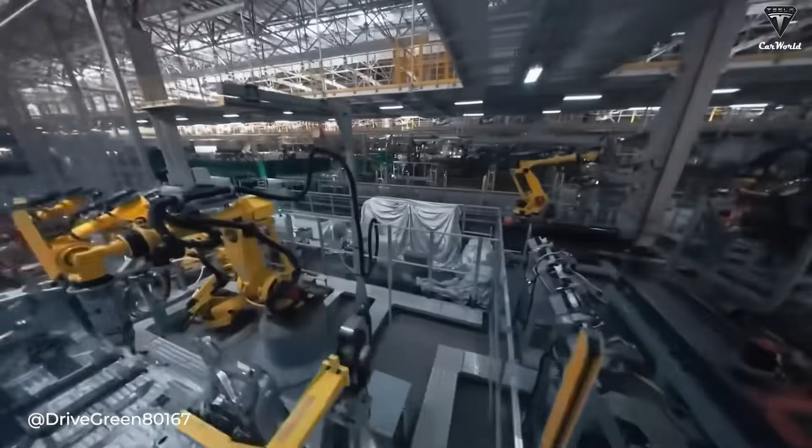One car, every 5 seconds. Not a concept, not a prototype. A fully assembled vehicle, rolling off the line faster than it takes you to read this sentence. For over a century, automakers competed by building better cars. Tesla just changed the game entirely.

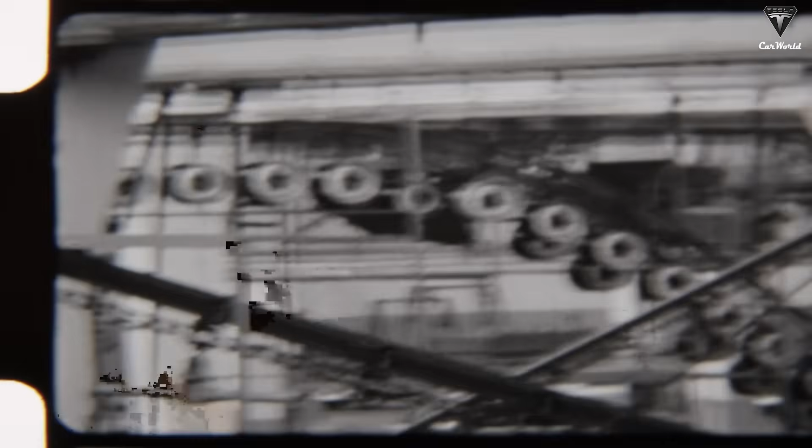While every other manufacturer is focused on the product, Elon Musk is obsessed with something far more powerful: the factory itself. And that single difference may be the reason Tesla's competitors aren't just behind. They may never catch up.

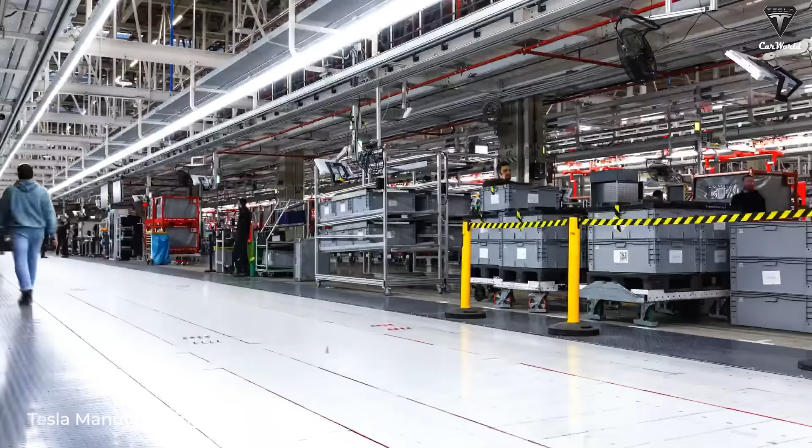For over a century, automakers have competed the same way. You build a faster car, a safer car, a more fuel-efficient car. You improve the product and the market rewards you. That has been the fundamental logic of the entire automotive industry since Henry Ford rolled the first Model T off an assembly line in 1908.

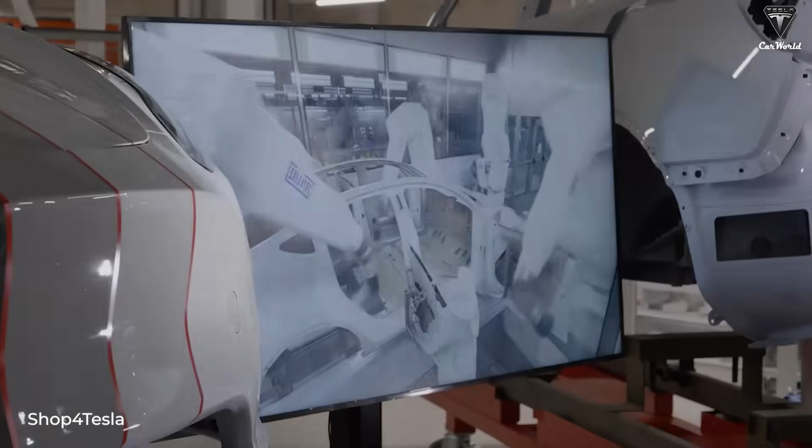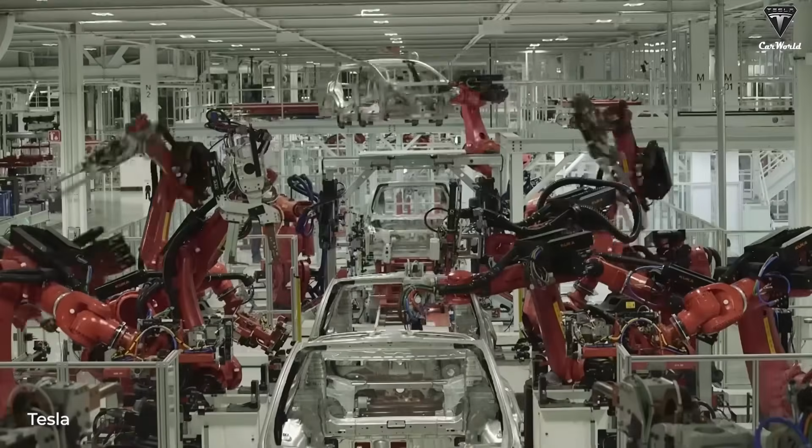But here's the thing about Henry Ford. He didn't win because he built the best car. He won because he built the most efficient system for producing cars. The assembly line wasn't a car innovation, it was a manufacturing innovation, and it changed everything.

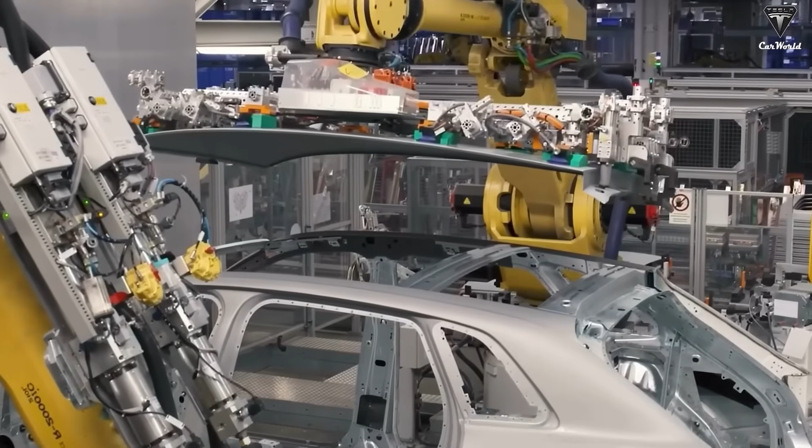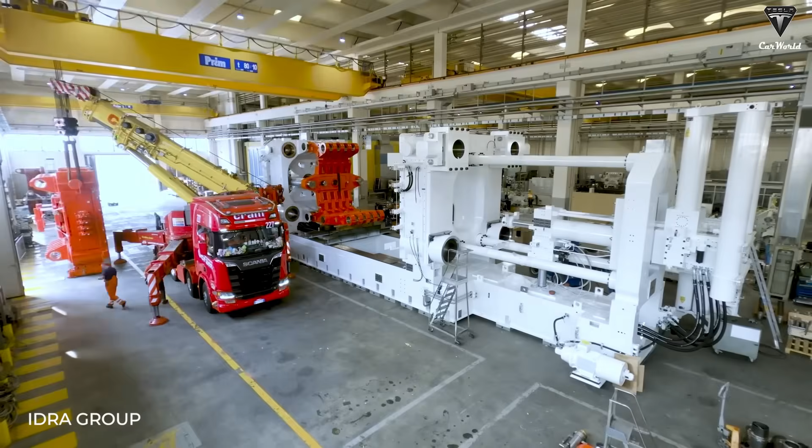Toyota understood this too. In the 1970s and 80s, Toyota didn't have the biggest budget or the most advanced technology. What it had was the Toyota production system, a philosophy of eliminating waste, reducing steps, and relentlessly optimizing every second of factory time. That system turned a mid-sized Japanese automaker into the most profitable car company on the planet.

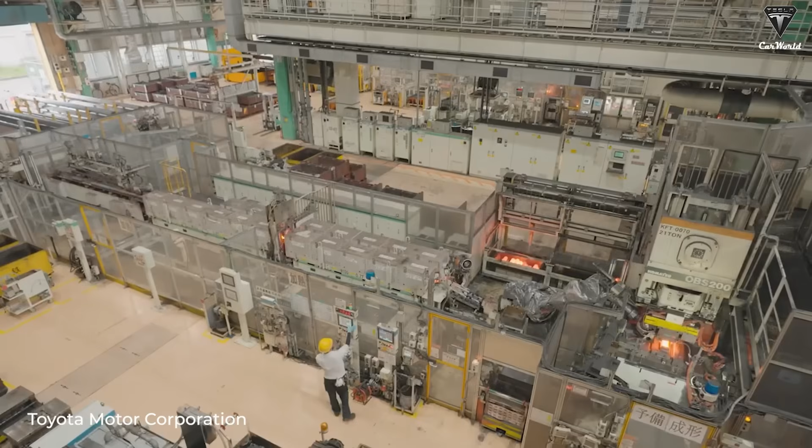Elon Musk has studied both of these stories very carefully, and he believes Tesla is now approaching a similar inflection point, a moment where the company that manufactures best will ultimately dominate the industry, regardless of which company builds the best-looking or most feature-rich vehicle.

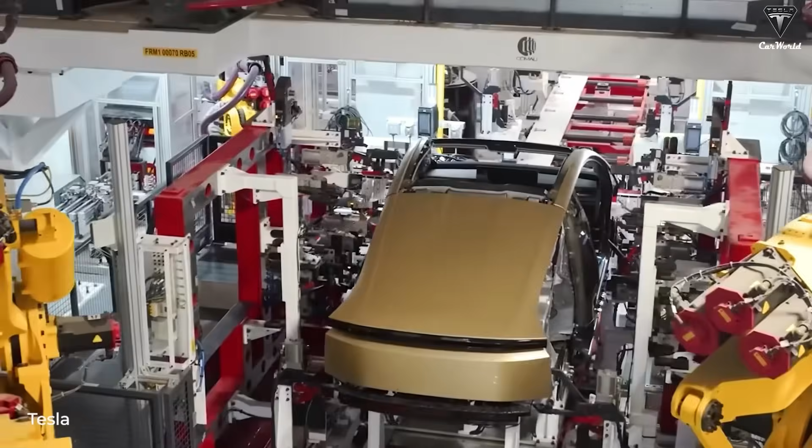This is why, while every other automaker is focused on improving the car, Tesla has quietly been doing something more radical. It has been redesigning the factory itself, and the results of that strategy are only now beginning to become clear.

To understand why Tesla's approach is so significant, you first need to understand just how complicated traditional automotive manufacturing really is. Take something as seemingly simple as the rear underbody of a car, the structural section that runs beneath the back seats and connects to the rear wheels. In a conventional factory, that single section is made up of approximately 70 to 80 individual stamped steel components.

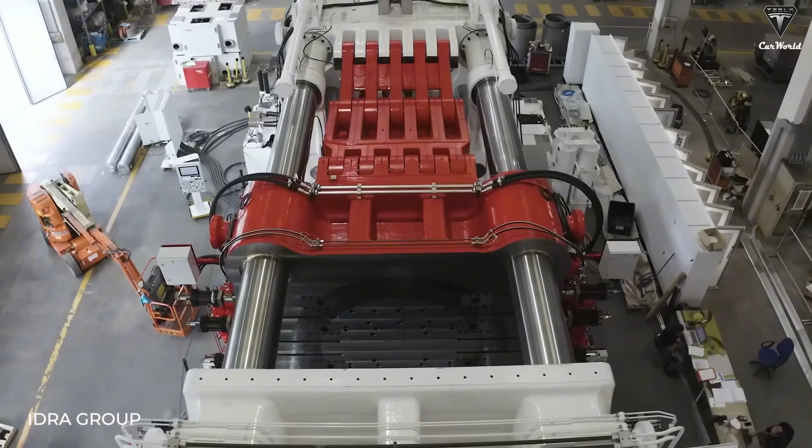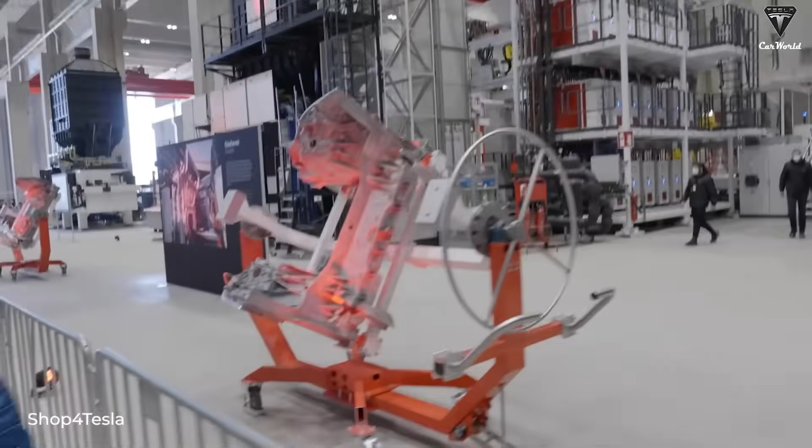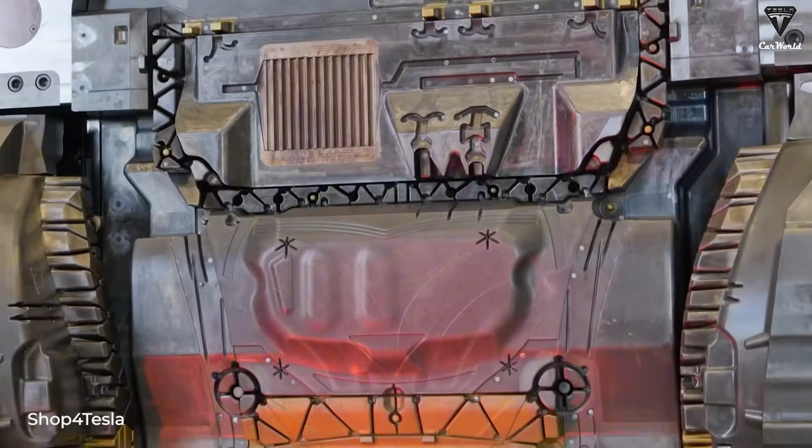Each one is produced separately. Each one requires its own tooling, its own quality check, its own handling step. Then they are welded together, one by one, using a series of robotic arms in a process that involves hundreds of individual weld points. This process works. It has worked reliably for decades, but it is slow, expensive, and riddled with potential failure points.

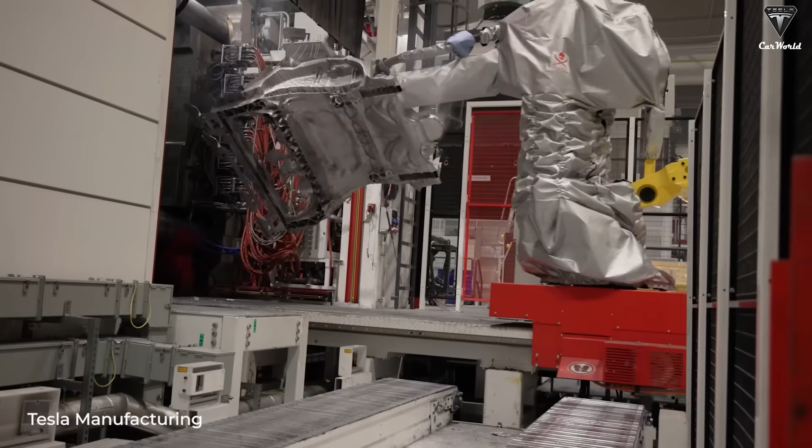Every weld is a place where a defect can occur. Every additional component is another variable the factory has to manage. Every extra step adds seconds. And in mass production, seconds multiply into hours, days, and billions of dollars in annual cost.

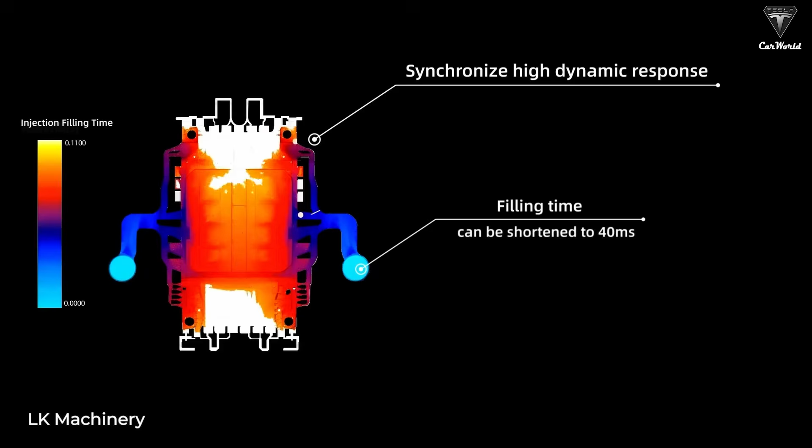The deeper problem is this. The traditional manufacturing model was designed for a world where complexity was unavoidable. Engineers designed cars around what factories could produce, not the other way around. And for most of automotive history, that trade-off was acceptable. But Musk decided it wasn't.

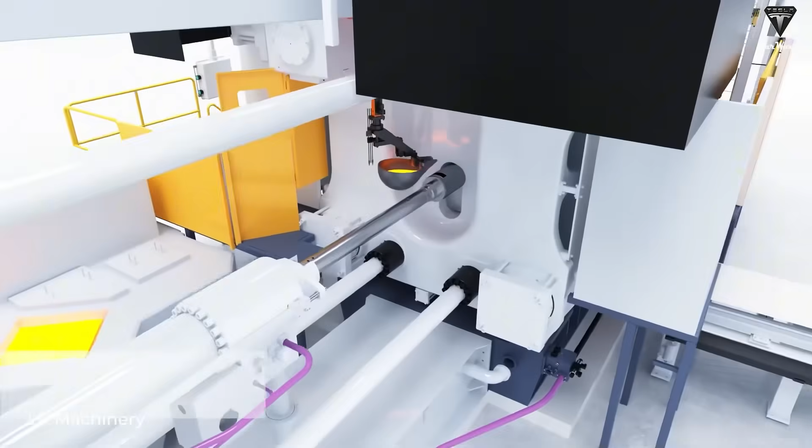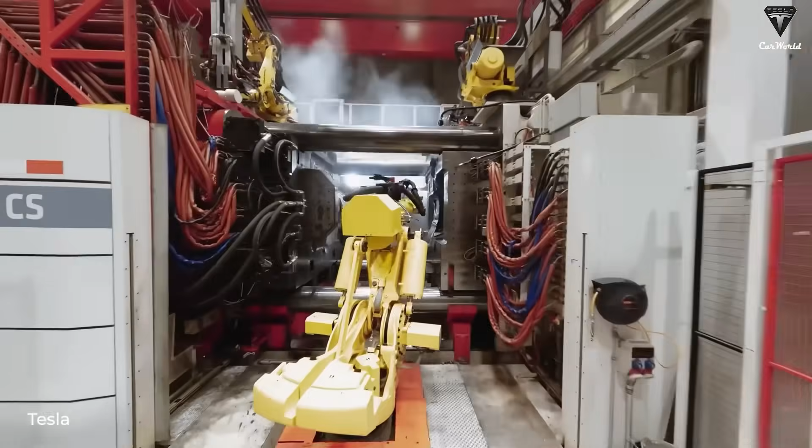He asked a question that sounds almost too simple. Why are we building cars this way? Not because it's the best way, but because it's the way things have always been done. That question led Tesla down a path that has fundamentally changed what an automotive factory can look like, starting with one of the most powerful machines ever built for industrial manufacturing.

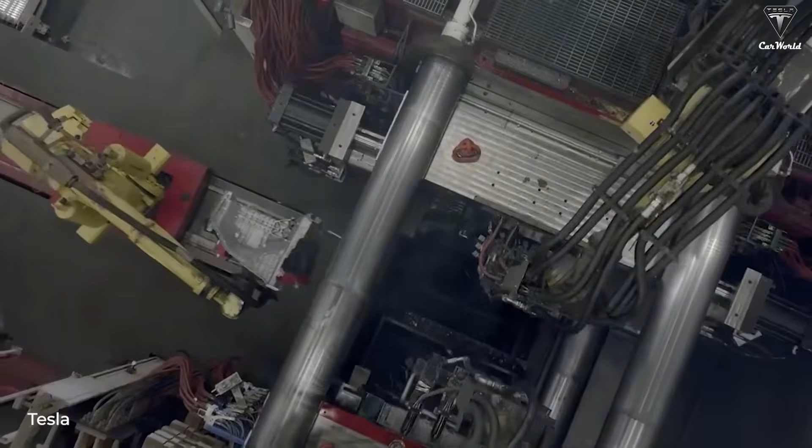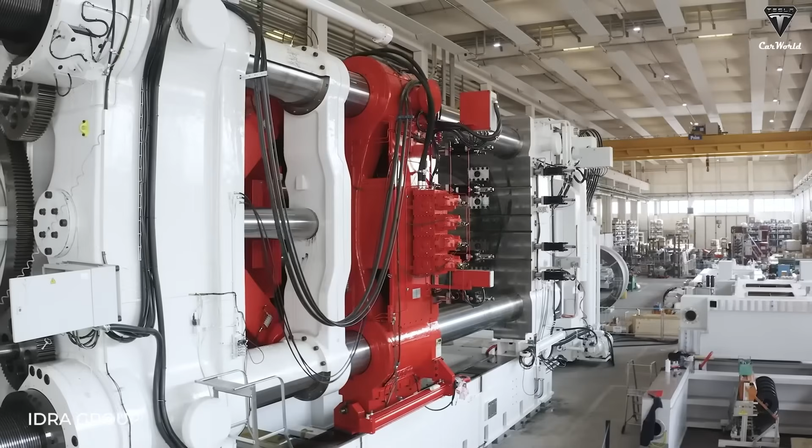The first answer Tesla found was Giga casting. The concept is straightforward. Instead of stamping dozens of separate metal pieces and welding them together, you inject molten aluminum into a single enormous mold and produce the entire assembly as one unified component. One part, zero welds, a fraction of the production time.

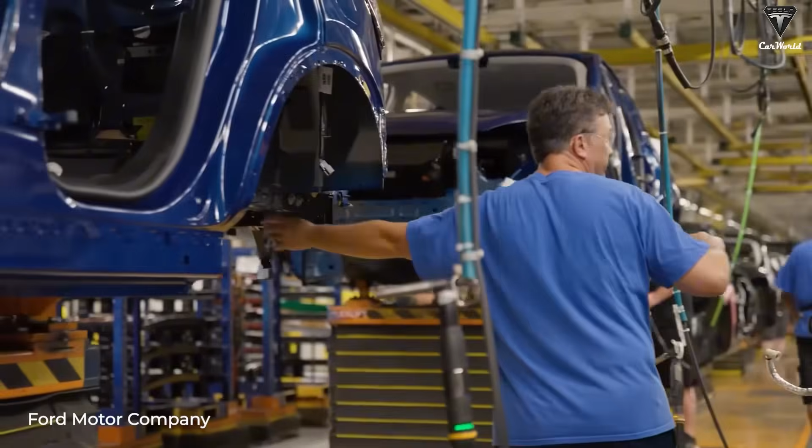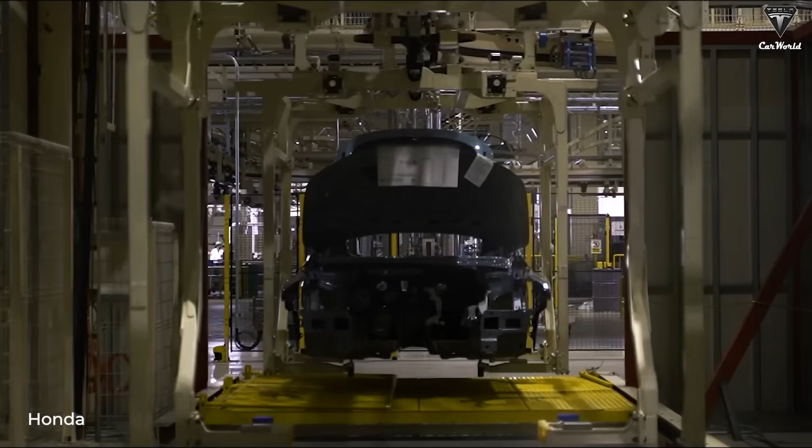Tesla partnered with Idra, a specialist company now part of LK Machinery, to build machines capable of generating up to 9,000 tons of clamping force. The result: that rear underbody section that once required roughly 70 individual parts can now be produced as a single cast piece. The robots and welding stations that handled those 70 parts? Largely eliminated. The potential defect points at every weld joint?

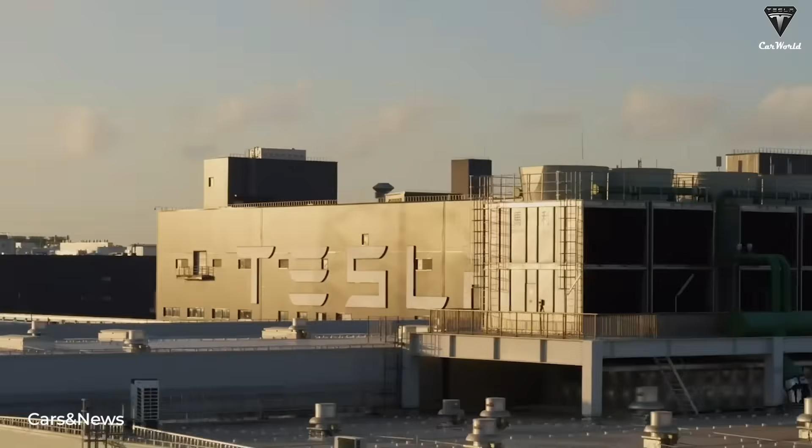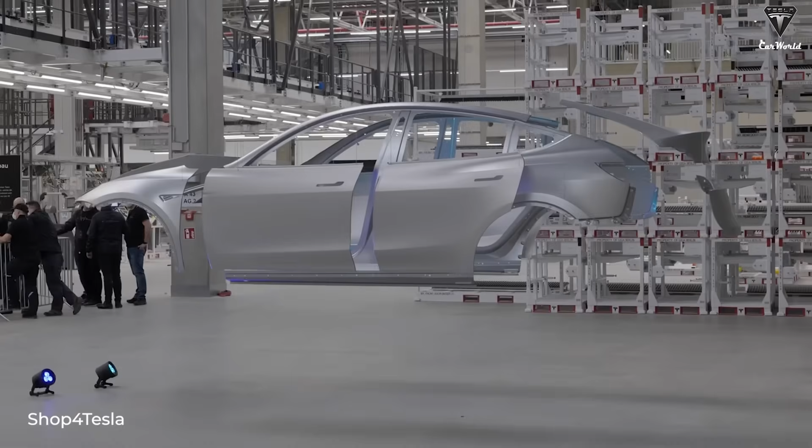A number so large it stopped most automotive engineers cold when they first heard it. At 50,000 tons, a Giga press wouldn't just be casting one vehicle section. It could potentially cast multiple structural modules simultaneously, the way a toy factory molds dozens of miniature cars from a single injection run. The reduction in downstream assembly steps would be extraordinary.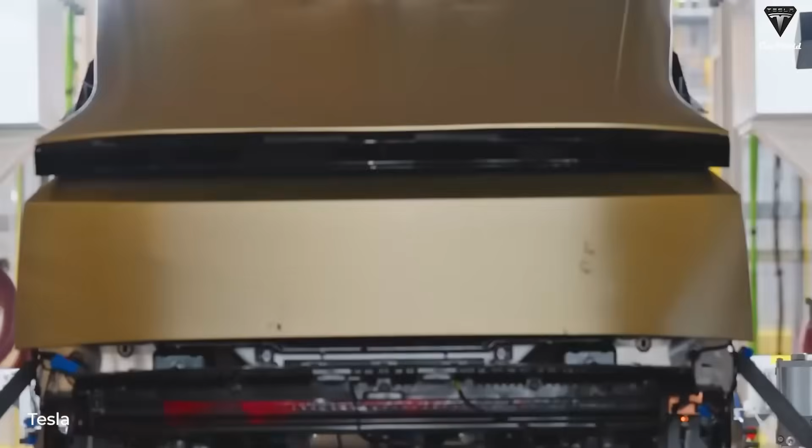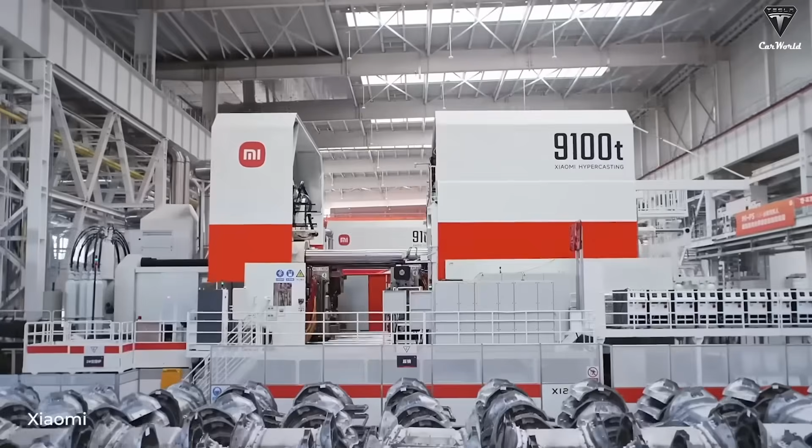But casting technology is only one layer of the strategy. The second is the 4680 battery cell and structural battery pack. In conventional EVs, the battery pack sits beneath the floor as a self-contained unit, essentially a heavy box carrying its own structural housing. Tesla's structural battery pack eliminates that housing entirely. The battery cells are bonded directly into the vehicle floor, becoming a load-bearing structural element.

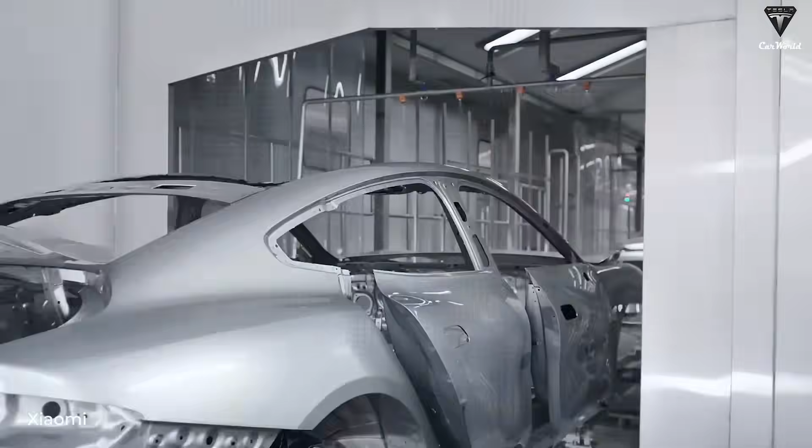The floor is the battery. The battery is the floor. You've removed an entire category of components, while simultaneously improving rigidity and lowering the vehicle's center of gravity. The third layer is what Tesla calls unboxed assembly, and this is where the manufacturing logic shifts most dramatically.

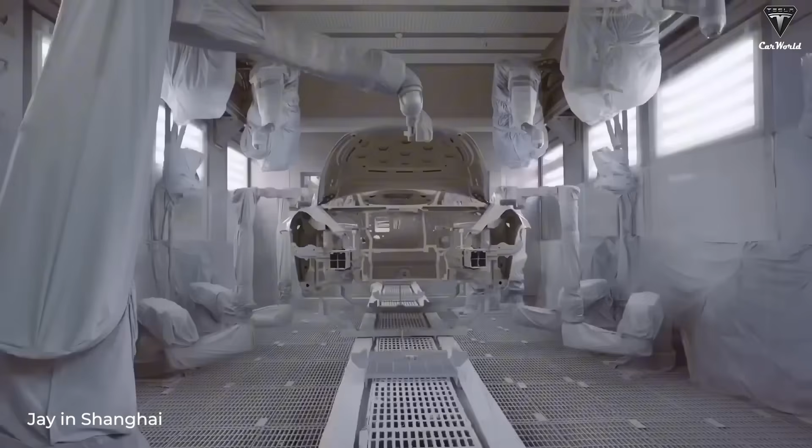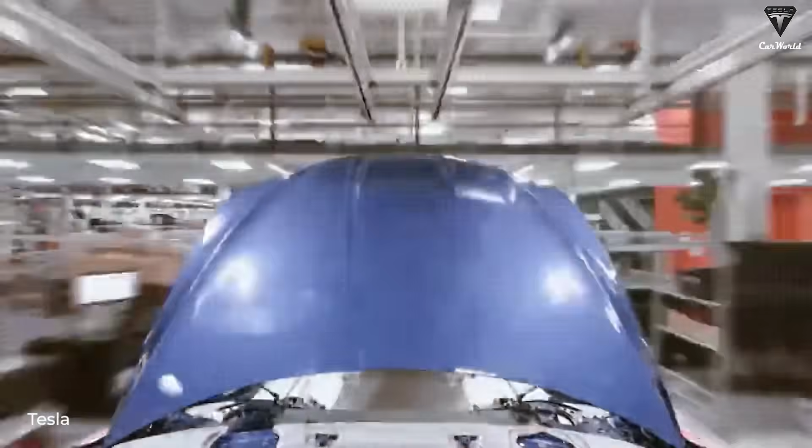In every automotive factory ever built, a vehicle moves through production sequentially. Station 1 adds the front frame. Station 2 adds the firewall. Station 3 adds the floor. The vehicle travels down the line, accumulating components one section at a time, from body in white all the way to final trim. Tesla's unboxed approach breaks that sequence entirely.

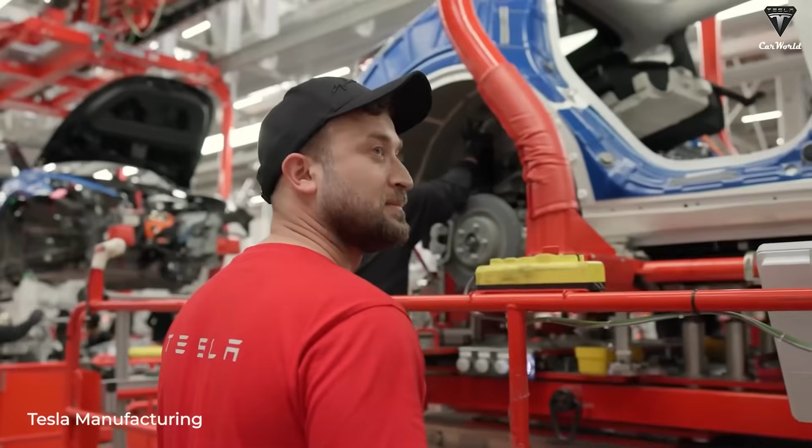Instead of one vehicle moving through hundreds of stations, the vehicle is divided into large modules: front section, rear section, floor assembly, side structures, each built simultaneously in dedicated zones. When all modules are complete, they are brought together for a rapid final join. The practical implications are significant.

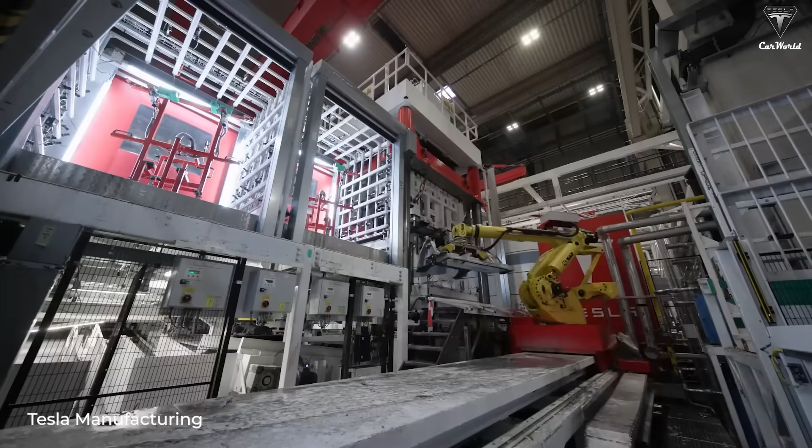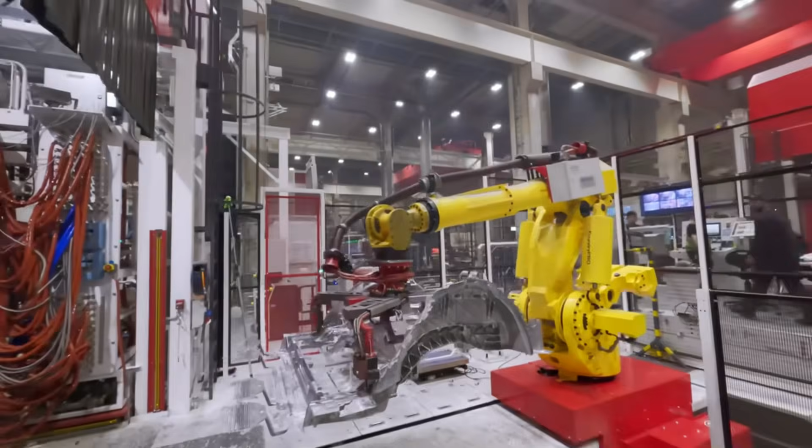Factory floor space is used more efficiently. Robots in different zones can work at the same time without interfering with each other. Bottlenecks that once rippled across an entire production line are isolated. And critically, the total time a vehicle spends in production shrinks dramatically.

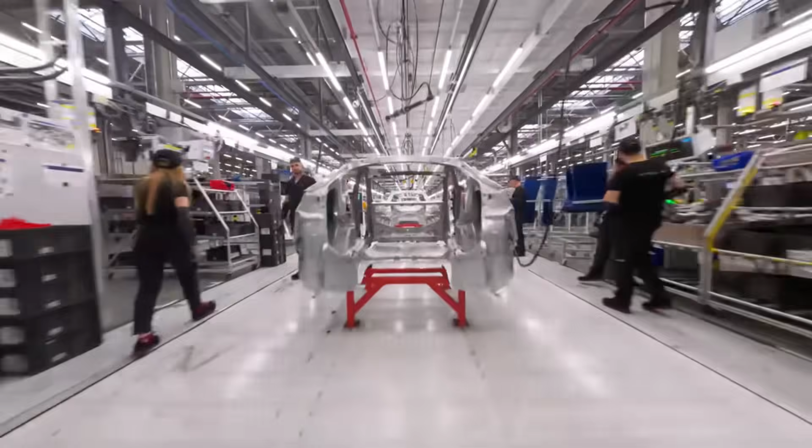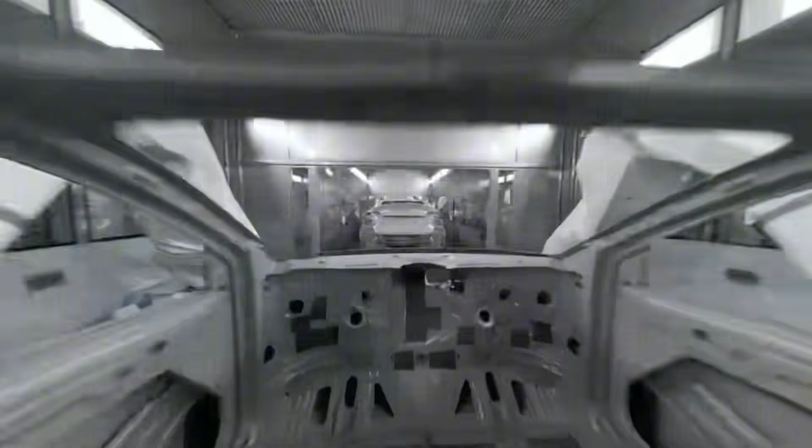Musk has described the Cybercab production line as no longer resembling a traditional automotive assembly facility. It resembles, in his words, a high-speed electronics manufacturing plant. Some sections move fast enough that it would be unsafe for workers to operate near them. All of this technology, Giga casting, structural batteries, 48-volt architecture, Ethernet-based wiring, unboxed assembly, is being designed into one vehicle from the ground up. That vehicle is the Cybercab.

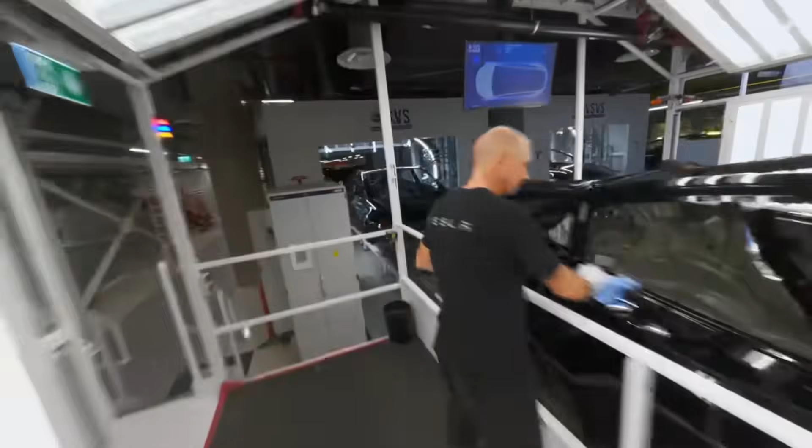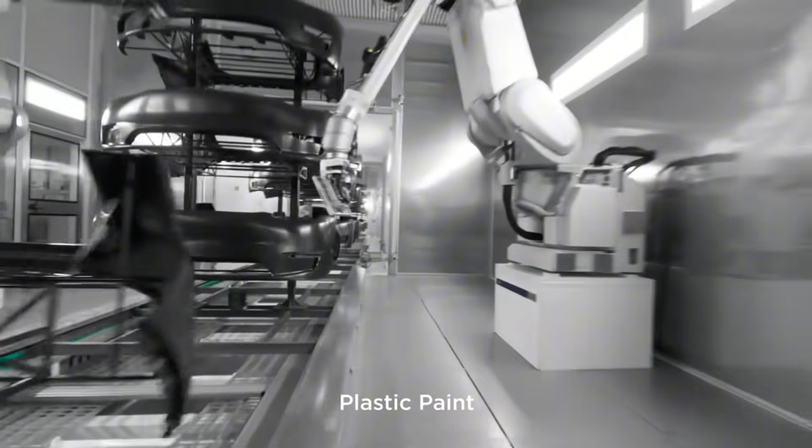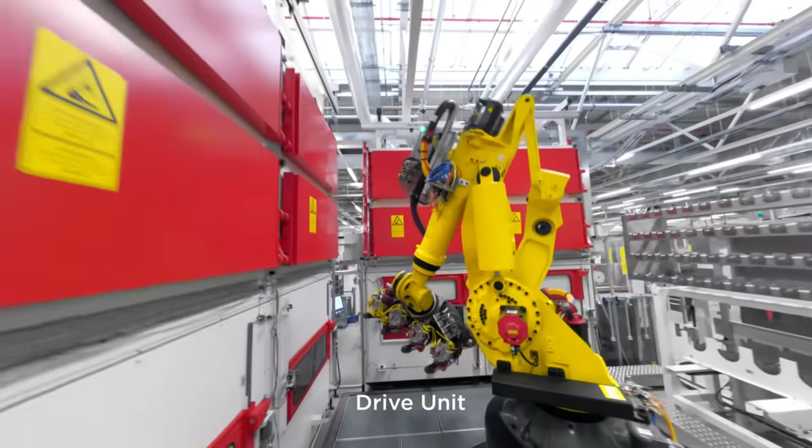The numbers illustrate the ambition clearly. The Model Y, Tesla's current highest volume vehicle and one of the best-selling cars in the world, requires approximately 200 major structural components during manufacturing. The Cybercab is being designed with roughly 80. That is a reduction of more than half. Not achieved through cutting corners, but through deliberately engineering complexity out of the product before it ever reaches the factory floor. This is the insight that most discussions about Tesla's manufacturing strategy miss.

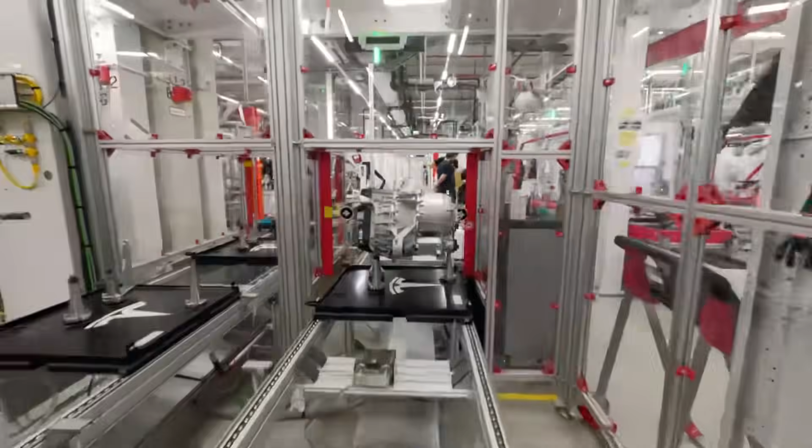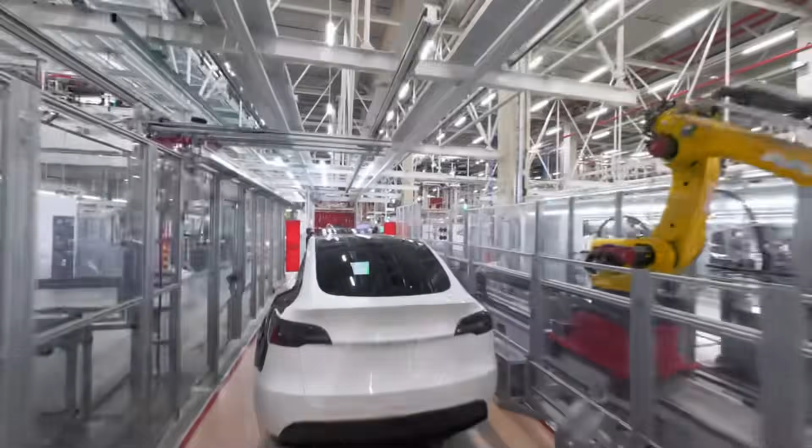The 5-second production target isn't something Tesla will achieve by running factories faster. It's something Tesla is designing its way toward by making the car simpler to build in the first place. Every component eliminated at the design stage means fewer robots required, fewer production steps, less time, fewer potential defect points, lower cost per vehicle, and critically, a manufacturing system that becomes easier, not harder, to scale.

Giga Factory Shanghai, currently considered one of the most productive automotive facilities on Earth, can produce a Model Y in a matter of seconds through its most critical stages. If the Cybercab launches with the full stack of Tesla's manufacturing innovations in place, the gap between those two production rates will represent one of the largest single-generation leaps in automotive manufacturing history.

A better car can be copied. A better battery will eventually face competition. But a manufacturing system built over years, integrating product design, gigacasting, AI-driven quality control, structural battery integration, and parallel assembly is genuinely difficult to replicate. That combination of depth and interconnection is precisely why Musk has always insisted that the factory is Tesla's real product.

Most people watching Tesla see a Cybercab, or a Giga press, or a quarterly delivery number. What Musk appears to be building is something else entirely. A manufacturing machine capable of producing millions of vehicles at speeds the industry has never seen before. Whether Tesla achieves one vehicle every 5 seconds remains to be proven. But the infrastructure, the technology, and the strategy are already in place. Tesla's greatest revolution may not happen on the road. It may happen inside the factory, and it may already be underway.